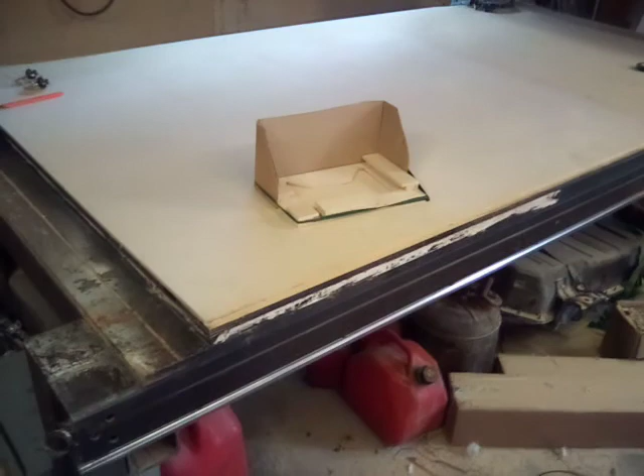So I've been trying to work on a dash for my Civic. I have a tablet as my gauges for my little Civic, and I whipped this together so that I could slip the dash in, and then I got a cardboard bit here to keep the sun off.

I'm going to CNC something nicer than that. Got my CNC already here. Wanted to show you, Doug.

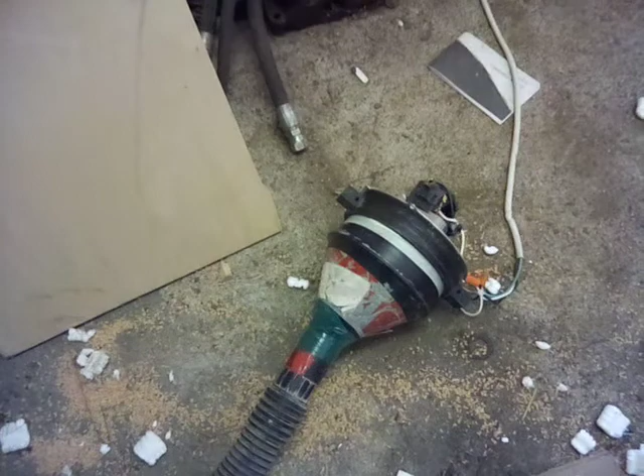You do a lot of sticky tape. I don't know why you use so much sticky tape. For years I've been wanting to show you my vacuum table. You can make something like this pretty easy yourself. This doesn't look very safe, but that's because I had to rob it back from work — the boys had it. I just run an in-house vacuum cleaner. It's best if you run a filter, but that's hooked up to my table, and that should suck the plywood down, saving you a lot of sticky back tape.

Anyways, I'll show you where this is going to go. Shop's a mess right now, I've been cleaning up — doesn't look like it.

Oh, what's that? Bass van? Maybe. We'll see, Doug. Bass van challenge, I'm coming.

Okay, here's the little Civic. Let's see if we can see what's up here. So I got the interior stripped out.

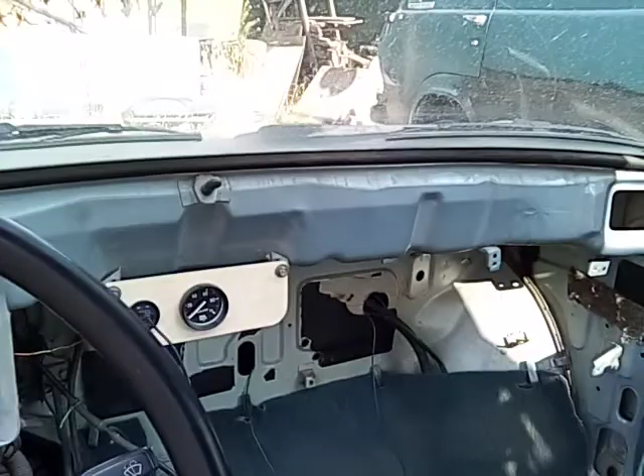I'm going to replace that gauge and put it in my new gauge set. This did sit something like that — you can see it through the steering wheel, pretty nice. Anyways, it's super ugly, not totally functional. I'm not very proud of it.

So I measured the cardboard. The cardboard is there so there's no reflection off the windshield at night and sun on the gauges during the day. That cardboard visor certainly helped both situations and helped me figure out how big I wanted it. So that's my template — I used it for a few days. Good to go, so I don't need that anymore.

This is, of course, my little Civic autocross car. It's pretty fun, I'm getting it ready for the next meet in 7 days today. Okay, I'll show you where we're at with my design so far.

Well, hello, Jaffrey, how are you doing? Sleeping? Yeah, it's pretty hot out today, eh, for a black cat? Yeah, all right, okay, let's see.

See if we can see here. Here's my basic design. The pink in there is, of course, a 10-inch tablet. You can see in here, there's the buttons, volume, and power.

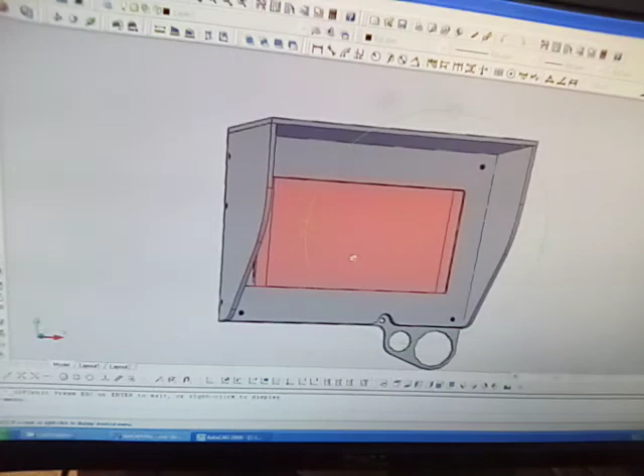I can still get access to them. I got some holes down here for my oil pressure gauge and a USB outlet there. And there's, of course, the cap on the top to keep the sun off. And then I've rigged it up for a little computer fan on the back, and it should breathe around these slots.

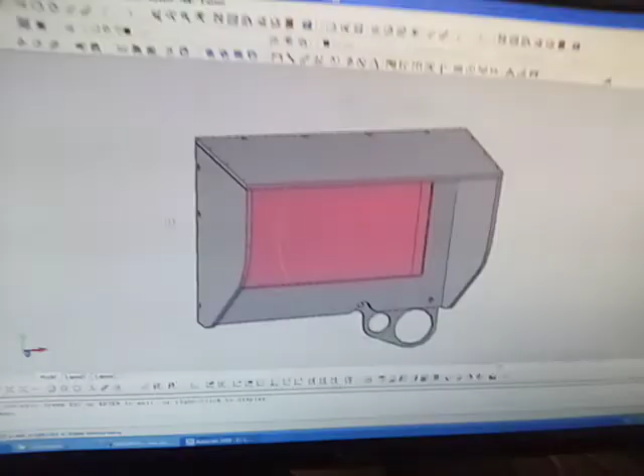And there's a recess there so the tablet should be able to slip in, much like Doug's Dashmods, only this is for a cheap junky tablet instead of a fancy one. So this tablet should just slip in and come down on the plug. Let's see if I can show you the plug.

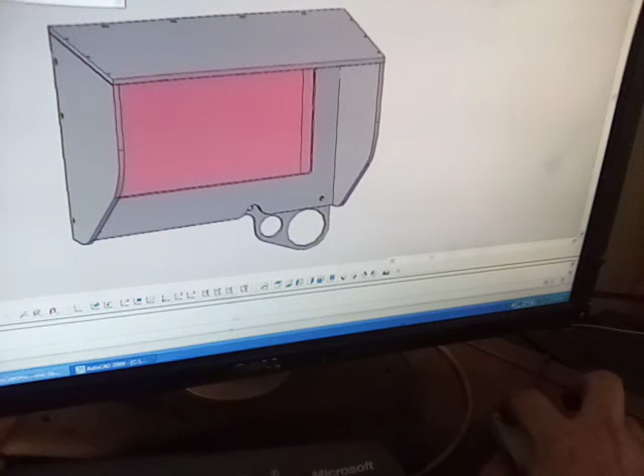Get rid of some layers here. Okay, get rid of... and one more. Okay, there's the plug — it will be recessed in and then stick out through a little hole in the back there, between the two pieces sandwiched in.

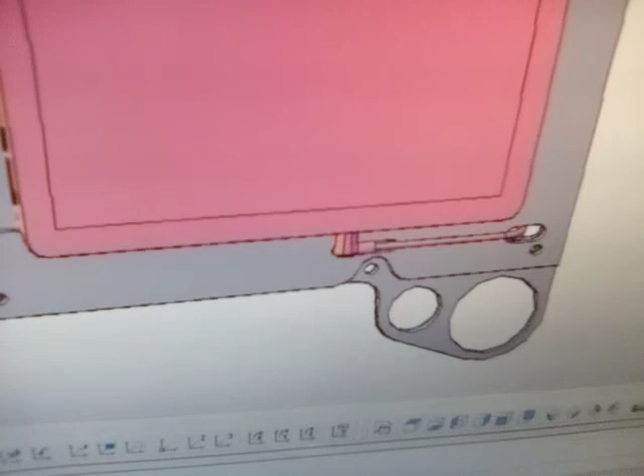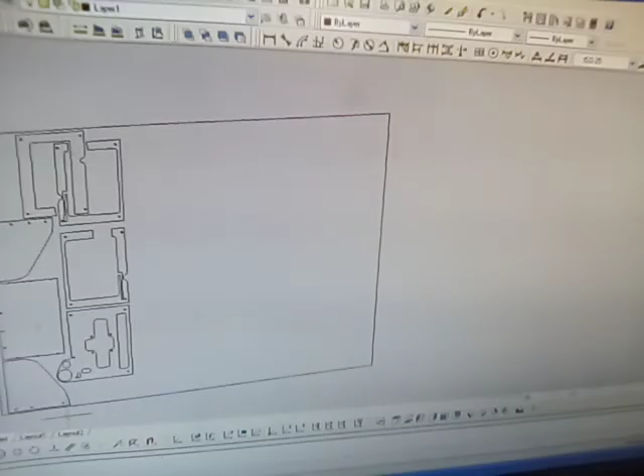So it's really just a whole bunch of layers of nice plywood. Then I've laid it out — there's a piece of scrap wood I had laying around. So I've laid out all the pieces flat, in a manner that shouldn't take up too much space. And of course I bring that stuff into my CAM software and add a little Honda logo.

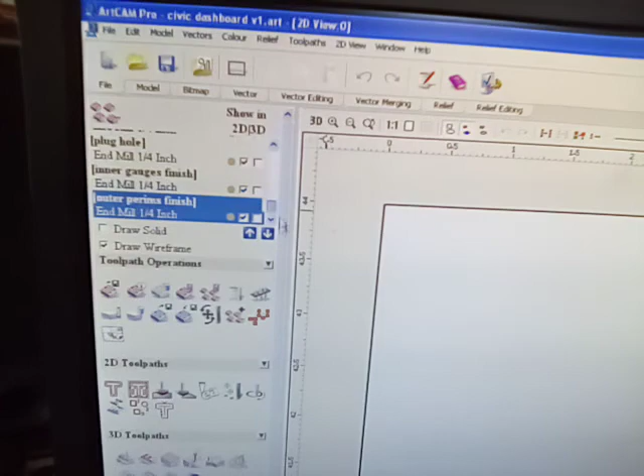Might as well fancy it up. So there's all my pieces programmed, ready to go. Tool paths, let's see — lots of tool paths. I just programmed this last night and this morning a little bit, and it's basically ready to go.

Okay, so I'll play with this a little bit. I'm going to get the machine cutting, and maybe I'll give you another look while the machine is cutting.